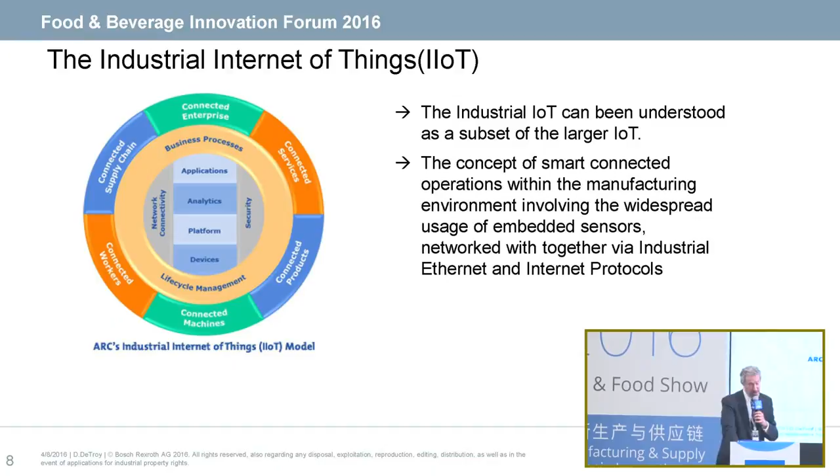So, last definition here of the three things I was wanting to talk about: IoT, IIoT, and Industry 4.0. There again, if you Google it, you'll probably get 100 different hits. There's about, I don't know how many different definitions. I've read a lot of them the last couple months preparing for this, but I'll give you the Bosch definition.

So you see, it's basically the fusion of the physical world of production with the virtual world of information. You see a lot of linkage there.

IIoT and Industry 4.0, maybe a quick note there. It seems like these two things are talking about kind of the same thing: industrial Internet of Things and Industry 4.0. There's a lot of overlap depending on the use cases. And the idea is that humans, machines, objects, and systems are connected with this information and communication technology, or ICT, and they do it in a much more dynamic and real-time way than maybe in the past.

You always had real-time for your machines, so you could have machine control, but did you ever get real-time up and out to other parts within your organization? That's a newer development. That's part of Industry 4.0.

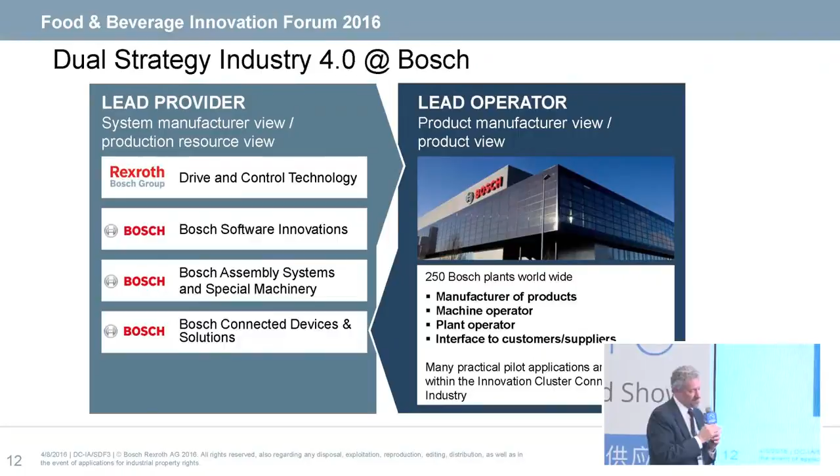So we have a really unique opportunity here within Bosch, both as a user or operator of Industry 4.0 technologies and ideas, and also as a provider. Some very nice synergies actually going on there.

So we at Bosch, and other companies, have identified other things. We've identified basically seven features of Industry 4.0 at Bosch. Starting at nine o'clock: distributed intelligence, fast integration and flexible configuration, open standards, virtual real-time representation, digital lifecycle management, secure value creation networks, and in the middle, people.

People as the players are an integral part of even highly integrated digital smart factories. They're still people. So let's look at a couple of those features, not all of them, but just a couple.

For example, distributed intelligence. One example there is autonomous rollers, or AGVs, automatic guided vehicles. Those are not new in themselves. You see those a lot in automotive facilities, but the idea now is to give them increased intelligence, increased connectivity.

So we talk about transport from a supermarket. That's kind of a Bosch term, where basically the supermarket is where the goods get received and we put them on a storage area for a very short time. And then we have the ability to feed the different production lines in our manufacturing locations autonomously.

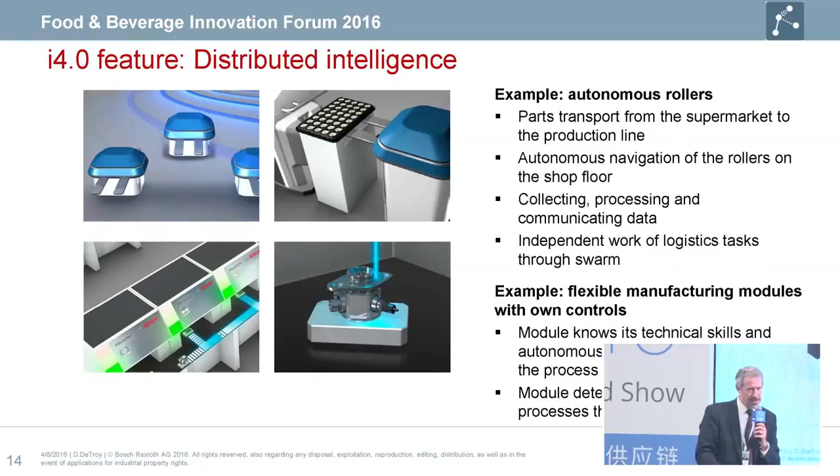And then as we continue in the area of adding intelligence to the manufacturing modules or operations, the modules or machines gain an intelligence of what processes they need to do. And these modules or operations have the ability then to detect, it's not so new, but an increased ability to detect what parts are coming in and to react and act accordingly. So that's one of the features of Industry 4.0 for Bosch, distributed intelligence.

Then another feature is fast integration and flexible configurations. At Bosch, like in many other manufacturing companies, we have what we call lead plants. So we have a lead plant in one part of the world, and sister plants in other locations, not around the corner, sometimes around the globe.

And as we're in the lead plant making changes to our processes and optimizing things, also identifying quality issues, we have the ability to get this out into our sister plants very quickly. And depending on load and where we have high demand, we can actually move manufacturing capacities around.

Of course, you need to have that on the other end. Back to the machines or the modules, they need to be configured, reconfigured, especially as they're picking up different manufacturing loads, and have the ability to string together on the fly, as long as the modules can handle it, to do kind of instantaneous production lines to meet increased demand. And have this concept of plug and produce modules that can be interchanged quickly with one another.

Of course, all this interchangeability and flexibility requires open standards. And we at Bosch Rexroth have been a proponent of this for many years. Bosch is a huge consumer of machine tools for assembly machines, for packaging machines around the world. So for a company like Bosch, it's really important that machines can talk to each other and modules can talk to one another. And as we move to Industry 4.0, the idea of moving this data out into a storage area and into a cloud, there needs to be a real set of open standards that allows people to get at this data and to do something with it.

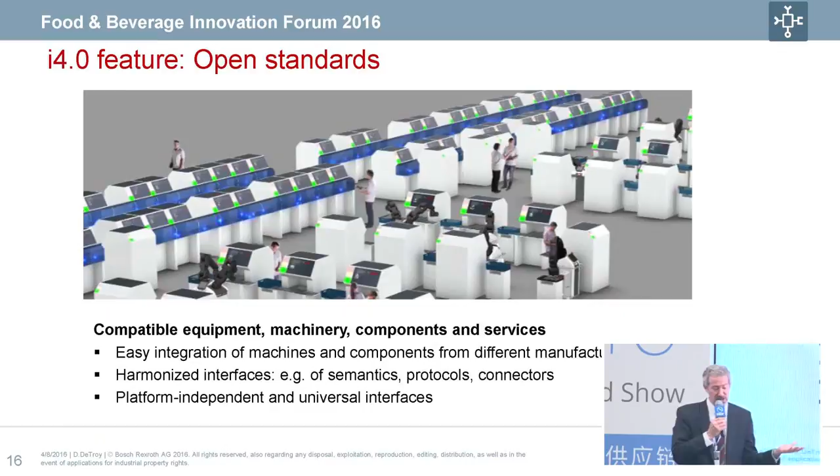So we have all these great interconnected networks allowing plants and production facilities to talk to one another. It requires a very secure network across our different facilities to share this data.

In years past, or still even today, you talk about doing risk assessment for machines. So you say, can I operate a machine with the door open, and if I have a handheld, how do I do a safe reduced speed, and things like that. Now they're talking about doing risk assessments for your IT structure in your facility, in your company.

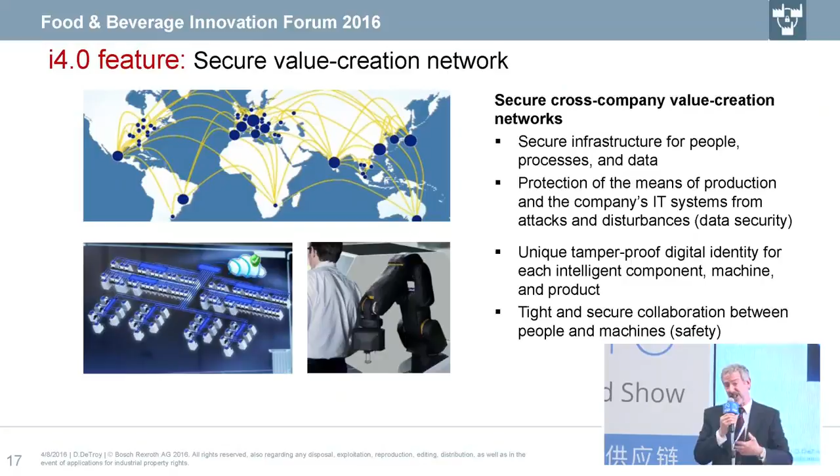It's also requiring training for the employees. This is an ongoing thing at Bosch. I have a colleague here who knows about all the information we get from headquarters, and this is being pushed quite strongly to get really a company-wide culture that deals with IT security, because we're going to be pushing more and more things out into private clouds or larger open global clouds.

We need to have a lot of tight and secure collaboration between people, machines, and manufacturing locations. Last, but of course not least, as I mentioned, in the center of our vision for Industry 4.0 are people. We see that in the future, smart factories, factories of the future, or factories with Industry 4.0 are not going to be devoid of people. People are just going to be doing different things. So we're going to have a lot of data being provided, a lot of analysis needing to be done, and mastering the complexity of this needs to be addressed.

And that brings us to the last topic, training. At Bosch, we are working continuously on training up our workforce, existing colleagues and new colleagues, to deal with these different technologies that are now really in our facilities already.

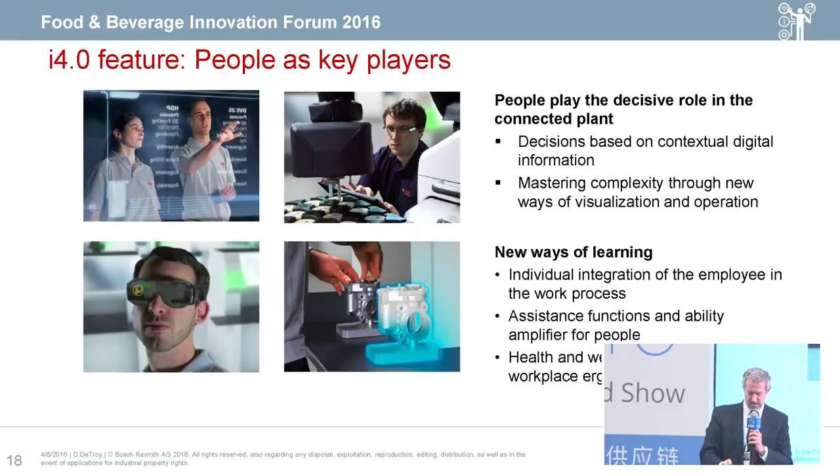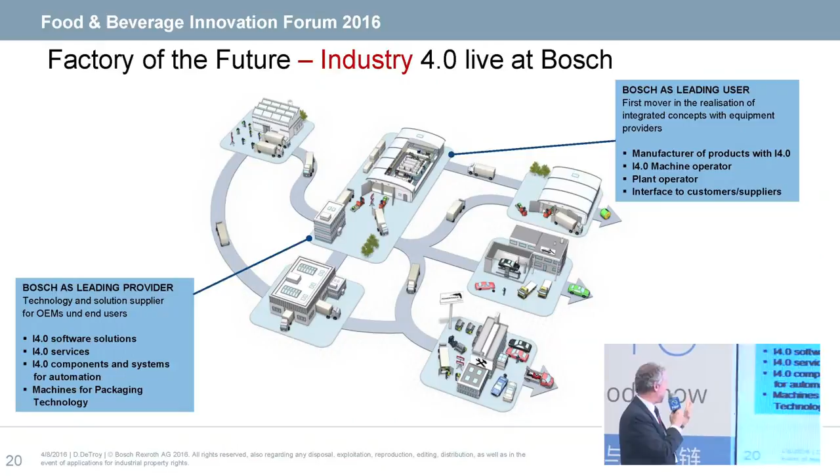So then my last topic for this presentation is what we call Factory of the Future. The first slide I showed was the space station somewhere up in orbit. This is much more down to earth. We have a lot of things going on at Bosch right now. Basically we have somewhere between 50 and 100, depending on status, pilot projects running in our facilities. In the right-hand corner, you see Bosch as a lead user, with all this experience in machine operation and plant operation and interfacing to customers and suppliers. And over here, Bosch is a leading provider with software solutions, services, components, and systems for automation.

So how are we doing this at Bosch? At Bosch, we have two streams that we're now pushing forward to advance our so-called network production. We have the pilot stream, where we have pilot projects, and then we have our mainstream. In our mainstream, we're working on optimizing existing manufacturing lines and processes - that's, I guess, what most companies are doing around the world. But we also have this pilot stream, and in the pilot stream we're doing stuff in pilot projects. They go through a process where they're approved, and then they just start doing it. As time goes on, we have the ability to take some of what we've learned from these pilot projects over into the mainstream.

And so we get immediate feedback, because a pilot project is usually kind of low quantities, not running more than one shift, and it's not real manufacturing. We have a nice opportunity - we feed some of these concepts over into our mainstream and then we get feedback from that.

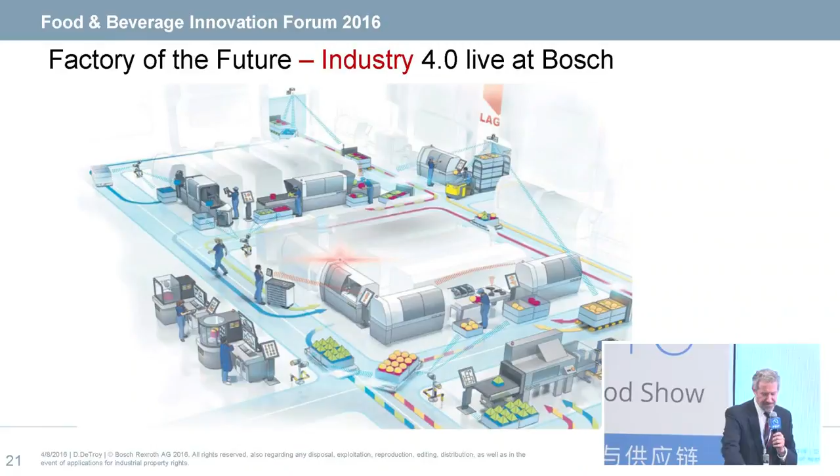So let's hit a few more examples here. As I mentioned, the distributed intelligence - components are identified at the machine, and they actually tell the machine how to adjust itself accordingly. We have that actually working now, I guess it's not even a pilot line anymore, you could almost call it mainstream by now. In a plant in Homburg, it's won a bunch of awards in Germany, and it's doing basically one-off assembly manufacturing of special valves used in mobile applications.

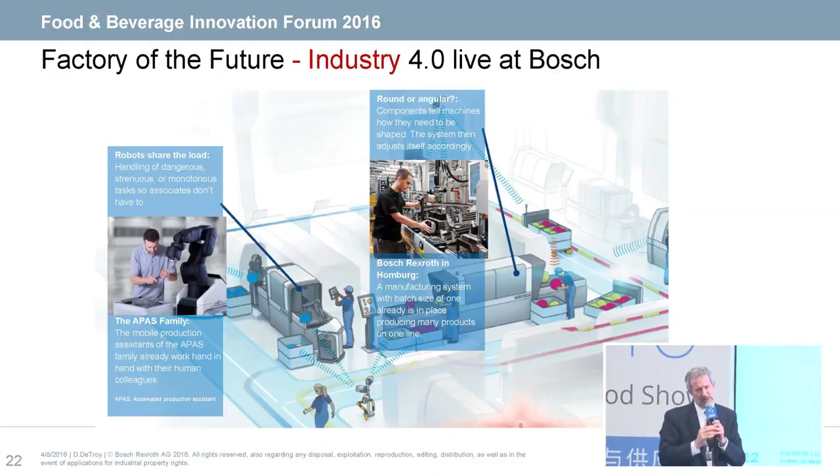This has been an opportunity - it started as a pilot line, it's running production now, and a lot of these ideas are being already integrated into other manufacturing locations. This is running in a plant in Homburg. We also have a family of robots called APAS - these are assisted robots, and they're not replacing workers, but they're taking some of the load off strenuous, heavy, or very monotonous jobs. We have these running now at several locations at Bosch plants in Europe.

There we go. I see I skipped a slide, I'll have to come back to that.

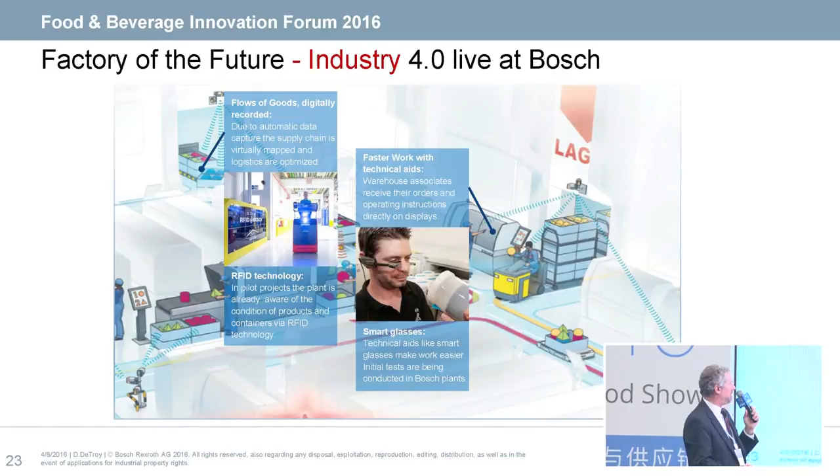I noticed I skipped a slide, so I want to go back to it. No, I guess I didn't. Sorry about that. Okay, and then we talked about quality.

I think any manufacturer of goods, and Bosch is known for fantastic quality, but even the best manufacturers around the world, despite really good in-house testing, still deliver products that don't work at a customer or fail prematurely even though they passed testing. So we're looking at Bosch now at how to look at data coming from the machines producing these things and doing data mining. We get lots of data in, and we look at different processes along the manufacturing where we're at limits or tolerances, so we can start preventively looking at operations that may be generating a quality problem. We're doing that in a plant in Charleston, South Carolina, the Anderson plant.

A big part of being flexible and fast is rapid prototyping. At Bosch we use quite a bit of 3D printers, or additive manufacturing, which lets us quickly build up a product using metal or plastic, and get the information back we need to make adjustments or changes to our manufacturing.

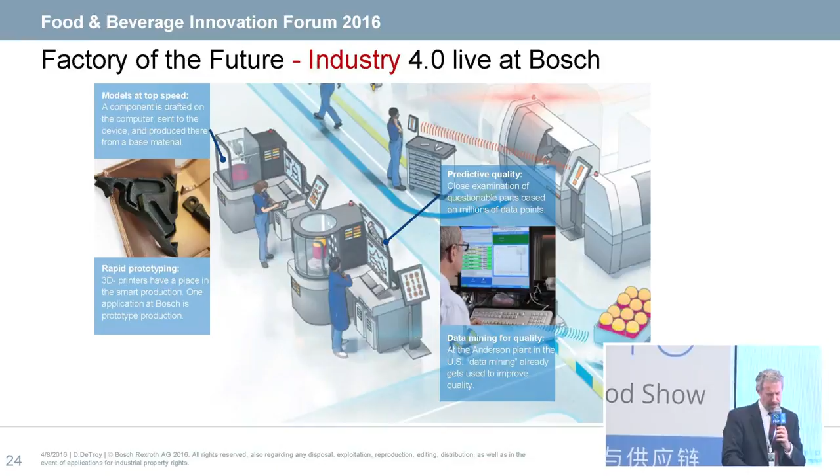We talked a little bit about predictive maintenance, reducing the amount of downtime. Most machines nowadays have a tremendous amount of sensors built into them already. At Bosch Rexroth we provide high-end servo solutions with a tremendous amount of sensors in the drives and the system. So there's ability to look at different data from a machine—speeds, current, following error—and start to analyze how the machine is performing even though it's not producing failures yet, but it's starting to get toward the edge, a curve moving in the wrong direction.

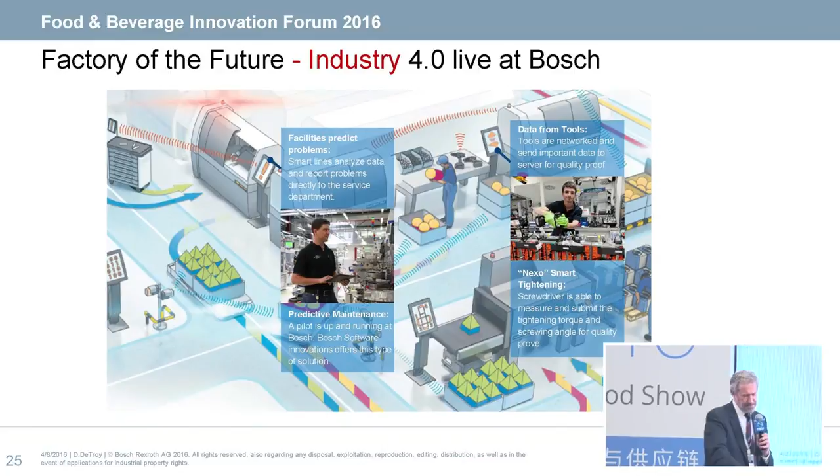We have that working at several pilot locations, also at a plant in southern Bavaria, and we're working with one of our sister organizations called Bosch Software Innovations. So that's some of the things we're doing at Bosch right now—we're really implementing Industry 4.0 and moving our factories toward this factory of the future.

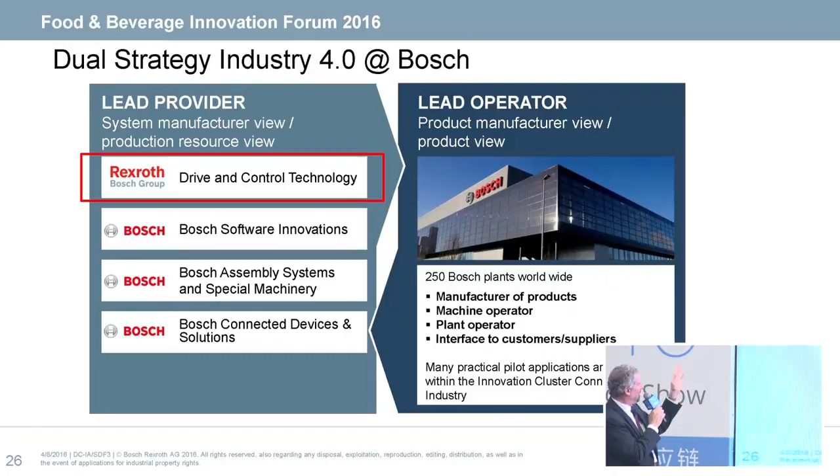That's on the right-hand side. On the left-hand side, as I said, we're a lead provider—just a few notes to make a plug for my division, Bosch Rexroth, the drive and control company. A lot of these pilot projects running at Bosch plants use products we supply, from controllers, whether motion controllers or CNC controllers, to intelligent drives.

We make different software applications, for example this web connector that allows data to get out of your controller using OPC UA and up to the IT world. We have remote condition monitoring—we put all this data up into a cloud with algorithms running there that let you do all sorts of analysis about how your machines are running. And then we have intelligent drives: not only do our drives move loads back and forth and position them, they give a tremendous amount of information back about how the machine is running, because we know its speed, torque, current, how hot things are running, and when things might be going wrong.

So that's a nice synergy we have going at Bosch. We have these products, they get into the Bosch plants, we get immediate feedback, we're able to make modifications, we're able to make new innovations, and I'll just hit one of them—one last plug.

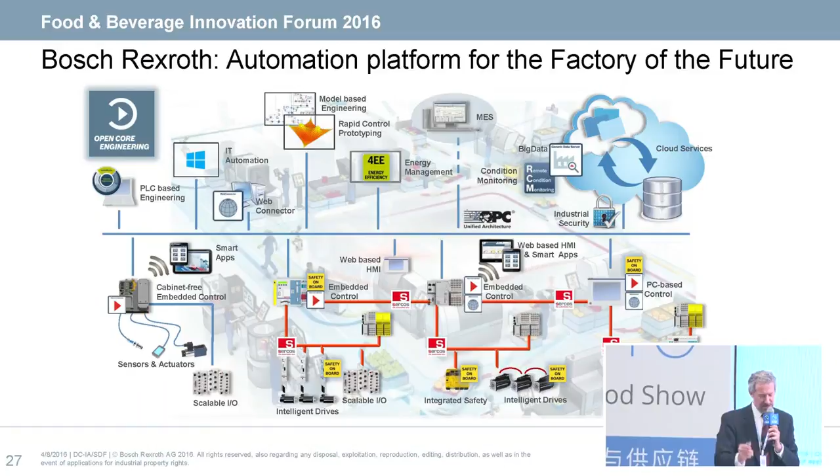We have a feature called the Open Core Interface, which basically allows connecting standard PLCs with IT-based automation. This allows our customers to write all sorts of specific routines that they want. We provide a huge library, but if somebody wants to go in and says, in my process I really want to look at speed and temperature instead of speed and current, because there's a correlation between these values that affects my production or quality, we provide an interface for people to grab that data, manipulate it the way they want, and store it where they need to. This open core interface is part of open core engineering, which is open - we provide this to our customers and allow them to configure their machines.

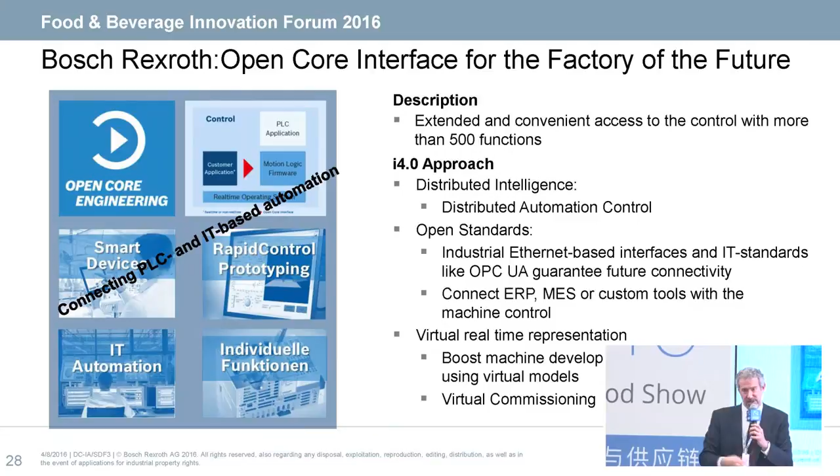I see I have 7 minutes and 58 seconds left, so I'm pretty much in time. I'm going to leave 5 minutes for questions and answers. As a final slide, we think that Industry 4.0 and the factory of the future really provides a lot of exciting new business models for machine builders and for end customers.

Okay, thank you Daniel. You're managing time very well. Thank you, very exciting presentation. Bosch has done a lot of pilots on the future plant, future Industry 4.0. Any questions?

Thank you, Daniel, this has been very exciting sharing from Bosch Technology. So my question is, you introduced a lot about the future plant factory - and the pilot plant looks really exciting - but what's Bosch's position on the legacy plant?